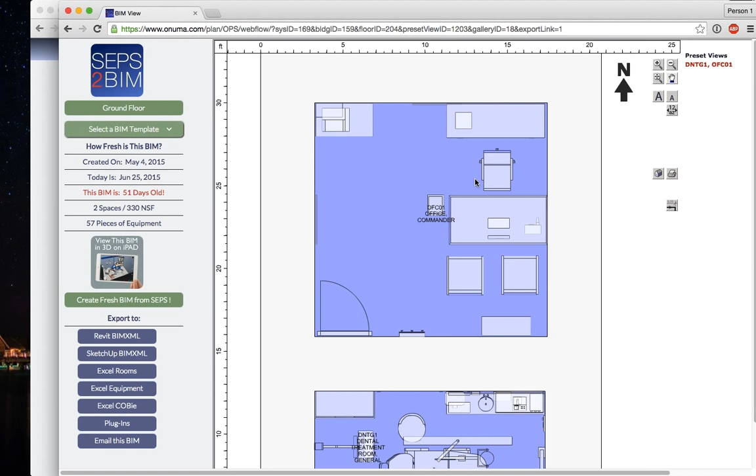That essentially gives you a BIM that generates a space and can show you the floor plan. You can export it to Revit and SketchUp and all that. So we're saying, okay, that's a starting point. If you do that and send a request in, that means you've actually touched the data, you created a BIM, and you can go away after that if you wanted to—although we really want the teams that are on today to do more than that.

On Tuesday, we had over 60 people that actually submitted something, even some that did multiples, and there was about 680,000 square feet of BIMs generated, both from this department and from the space and the department. So that's part A.

The idea is that these submittals, we're going to make that one of the projects that we park in the system, and I'll explain that as we go along. So the submittal says, okay, we need a new dental exam room. And the default is going to look like this.

One task might be a team that's an expert at medical planning for equipment and layout. You could take just this single room out to SketchUp, Onuma, or Revit, make recommendations, change the size of the room, move the equipment, or even add or delete equipment, saying, based on today's practice, here's what a dental exam room should look like, and submit it back. We want to keep the task simple so you're not going through 300 rooms doing this.

Even if you move a single piece of equipment or add a piece like a Stryker boom arm into the system and submit it back, that would be a win, saying we had an interaction with owner data from SEPS, VA, and DoD that says here's what we know is in our database. Then the designer says, no, this is wrong, we need to adjust it. Because this is actually what happens at VA and DoD on a continuous basis.

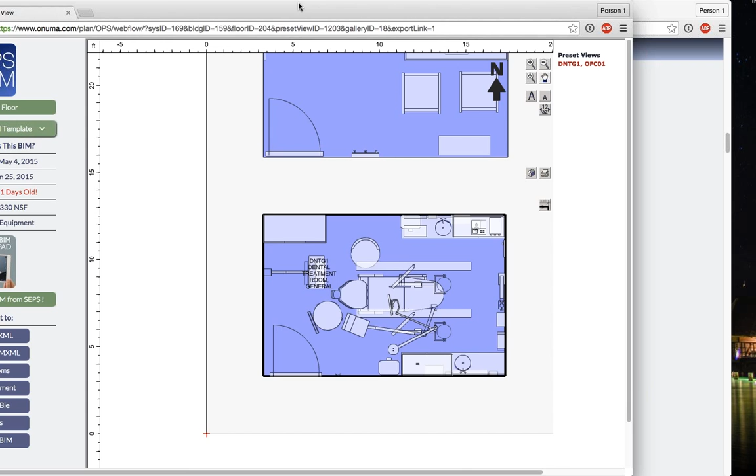They're continually updating their departments and standards, and it's been done in a very manual process. In fact, it's just transitioning now, but basically they're using PDFs and BIMs that are not connected in CAD files. So we're trying to move it towards, now that this data is accessible, there are ways to automate this process.

So that's one task. Part A generates that, which goes to Part B. Part B is design a typical space or department, take that exam room, edit it, do stuff with it. And by the way, these recommendations are just guidelines. You can take off from that and do anything you want, as far as having a better idea of how to do this, or other applications. We're not limiting the tools being used. We just want to really see the connections that can happen.

For example, you might even say, well, we want to delete all the equipment and make a recommendation for a completely new room or a completely new way of doing this. If we can demonstrate that, we'll make that part of the result that we present on the final day.

So Part C, design team part C, is design a project using the SEPS BIM Excel export.

I'm not sure if Attainia is on. If Attainia is on, can you raise your hand or chat in the box there? Young, I think you're tracking the chat, but we can open up the mics too if anybody wants to speak while I'm going through this.

But Attainia does a lot of work with SEPS. They're SEPS experts. There's a lot of different consultants out there that work with SEPS, but Attainia is one of the leading firms out there that actually works with SEPS, and we had a discussion with them last night. And we already have a SEPS.

I have Michael Blair unmuted if you... Oh, Michael. Okay, great. Or thanks, Michael. Speak as well. Are you there, Michael? Yeah, definitely, Kimon. Great. Thanks for the opportunity.

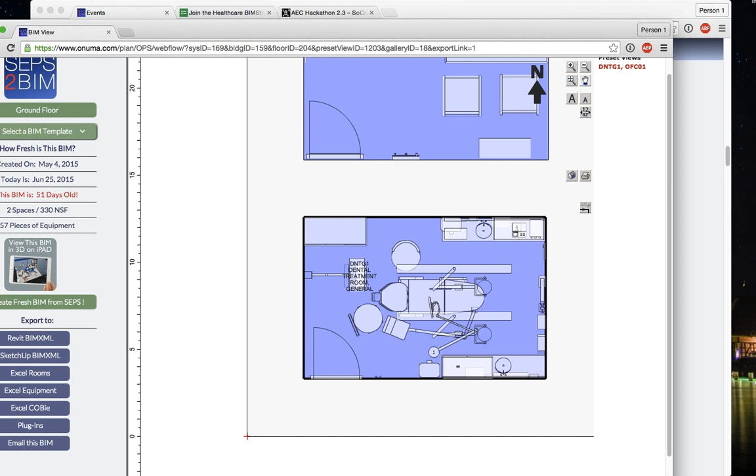Correct me if I'm wrong, Michael, and I'll let you explain what we've been doing together about that. So you would actually be adding more information to this generic room or the hospital, or adding more information from the Attainia side to the project that's being set up. Is that correct? Yeah, so the goal is essentially, as the project matures and the life cycle goes through, that we're adding more specific detailed data along the path, and then within the modeling systems you can actually see the attributed data of the specific equipment.

So instead of a generic piece of equipment from the JSN side from SEPS, you can now see the more specified model that's actually been chosen for that room. As you start to make design changes, you now have that more detailed information at your disposal to make specific decisions in real time. So whatever you can participate on that, we'd love to have Attainia's name in this, because this chair that I just opened up that was in that room has very limited information. This is intentional from the VA side; they don't want to specify a specific product here, but Attainia has information that can be added in. This is a good example of how, as the teams work together, there's a lot of different experts and tools that come into play.

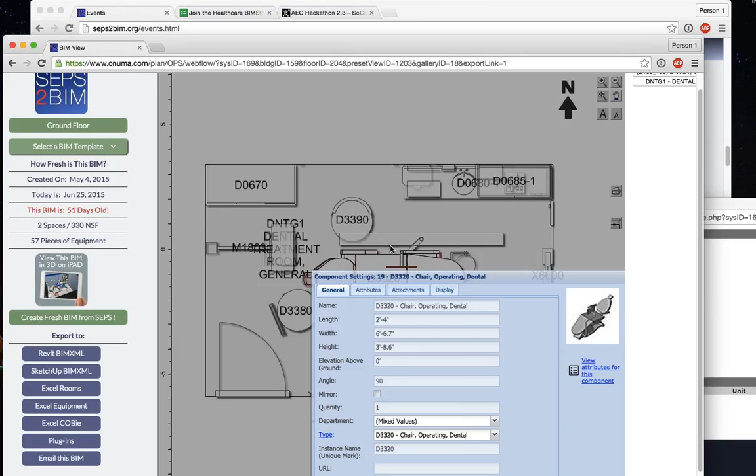Not everybody has to understand all the systems. So if you're a designer laying out this room and you want to do a layout of an exam room, you could just focus on that. And as Attainia comes in with their data, more information can be added to this chair, saying here's 3 options or 10 options for a chair. That's one very simple scenario getting a lot of attention from healthcare owners: how do we transition from a generic assumption that we need this kind of chair in this room, to actually making a recommendation of a specific chair and then delivering it.

Okay, and part C, Enova, is Enova on? Regarding Enova, we have Luis Martinez and Eric Hunt. I'll go ahead and unmute them. Okay, great. So Unova, are you on?

Hello? Okay, well I could actually explain what, so yeah. Eric and Luis, if from the Innova group, are you guys on? Let me tell them that we're trying to get you. Okay, I can't hear you very well, but...

I had an email back and forth with Chris Phillips from Innova last night, and we've worked with Innova before on other projects at VA and DoD. As I explained earlier, Innova works with SEPs; they know how to output from SEPs. So the idea is we'd like the Innova group to participate by doing a sample project.

It won't unmute me. Oh, I can hear you now, okay. But your voice is very weak, sorry. So this is Chris. Yeah, go ahead. Oh, hi Chris, sorry. Yeah, Luis and Eric were just listening in, so I was the one looking to get unmuted. I think one of the questions, let me ask you again just to make sure I hit the piece you want.

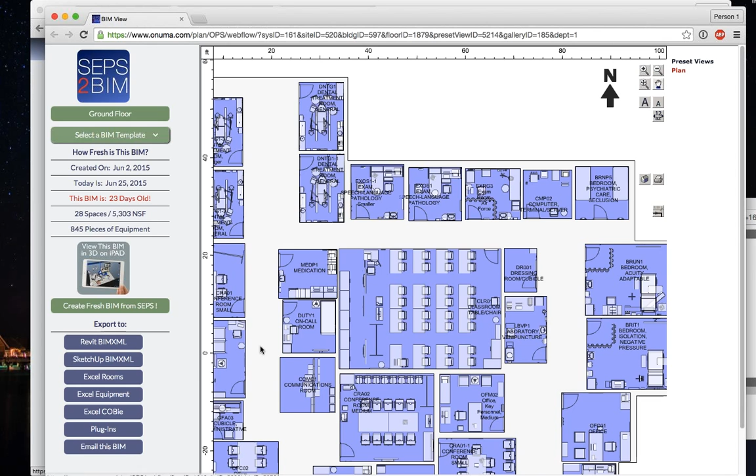For those that have access to the Onuma system, if you have a login already, you can log into the Onuma system and get the full functionality of this project, which is linked from here. Or you can use the link I'm showing you, which is open to anybody. This is completely public — you're not able to edit and move spaces here, but you can export to other applications. If you had Onuma system access, you could launch into this and edit it.

We'll give everybody that's part of the BIMStorm team who's logged in today, if you're going to be participating, access to the Onuma system. We'll give you a login and instructions on how to get there. But you can even take this and say, okay, let's take it out to SketchUp and take it out to Revit. Now, one clarification here.

The layout you're looking at here, most of the rooms look like they're actually resolved — they look like rooms with the equipment where it should be. These are starter templates, as we're calling them, kind of a default location. The ones we'll be getting from Enova, there's going to be quite a few spaces, because out of the 500 that exist in SEPs, there's about 200 that have layouts like this. The other 300 have what we call a truck delivery method, where the equipment is stacked in the corner of the room — it's the actual data from SEPs, but it's not laid out.

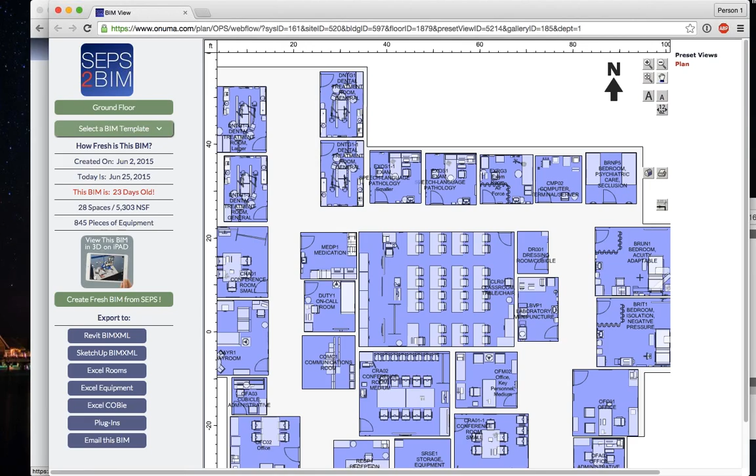Especially on the Onuma side, if you add a new JSN that doesn't exist here, it's going to show up as a block, I believe. But we'll still have the equipment in the space. So it would be interesting to see that interaction — what happens with the design teams when they see a mixture of laid-out spaces with equipment and other ones that don't have any layout.

Okay, so we have a bunch of teams, and maybe if anybody wants to say anything from the design and construction side — I know there's quite a few of you online right now — just put it in the chat box. But I'm going to go ahead and introduce the scenario for that.

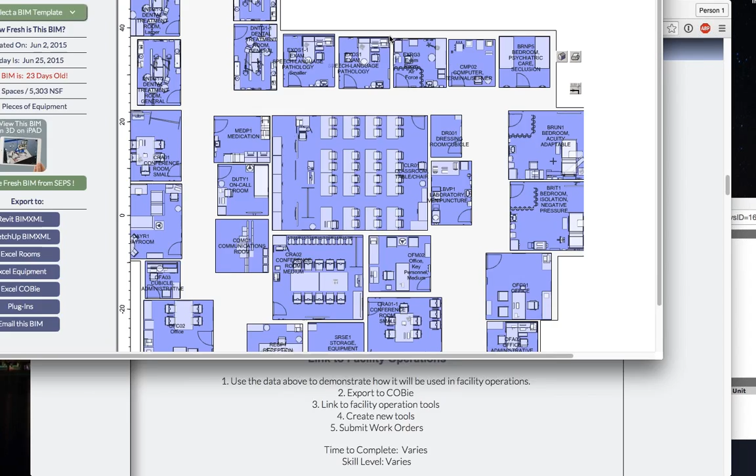I'm open to recommendations and different approaches to this, but you would take the program requirements we just described, and it's going to look something like this. Your task is to do something with it, even if minimal, even if it's saying we think this layout, these rooms should be over here. They're going to be stacked together, so you might move them around, move them to a different floor, or even focus in on a single room.

We're not looking for resolution of the whole design. We just want to see some examples of interaction that we can demonstrate in the hack. And we're kind of redefining in many ways what the hack is all about. A hackathon typically focuses more on the programming, the development side of software.

But we're saying on the design side, as decisions are being made and data is being added, when you move a piece of equipment, like from SEPS, if you add another piece of equipment, or if the designer grabs this and moves a space around and moves equipment around, the data in the background is changing, and the development team that has access to the data will see changes to that database. So if a new room appears, it'll show up in their database. If they create a mobile device, or have a mobile device for reporting or asset management, they will see that data live.

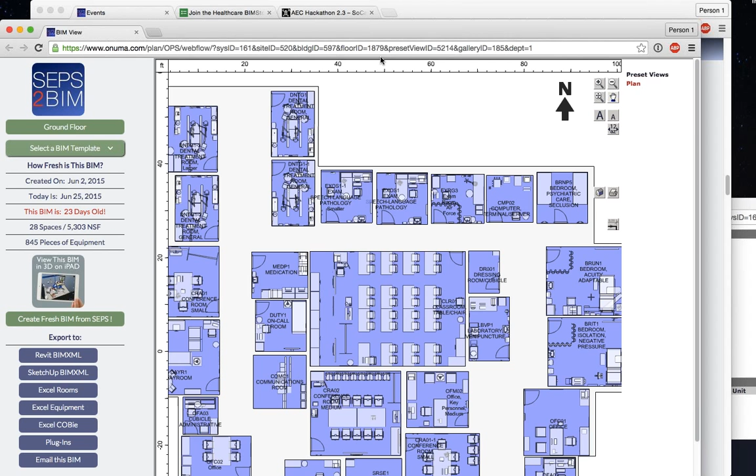That's the intent here: it's not just about teams developing software, it's actually teams making decisions that feed into the data that gets updated. So we're trying to show the full view of that.

So design teams, does anybody want to say anything or have any questions about this design and construction process? We're looking for things like making decisions about design.

We're looking for things like possibly cost estimating. We're looking for things like spotting potential problems that you, as a medical planner, can see coming out of SEPS, because SEPS is not perfect. Like Nova mentioned earlier, there are changes that happen that are not updated, and there's domain expertise that says, okay, we know this exam room coming out of SEPS is using an old piece of equipment, so we swap it out when a project happens.

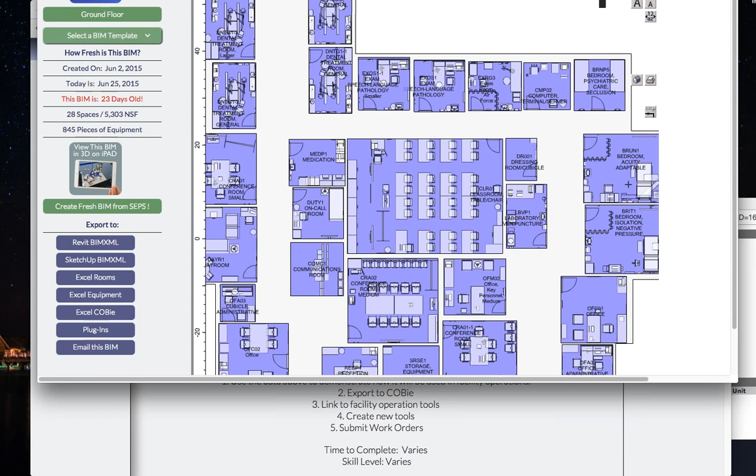So we want the design teams to be able to interact with these models. And one significant thing on the SEPS-to-BIM process: we identified in the SEPS output there are what are called GUIDs, a unique ID for every single space, every single piece of equipment, unique to that one chair in that one room on that one floor in that one project. That can be tracked with applications.

The SEPS output typically used today, or in the past, by VA and DoD, is they export what are called PFD, Program for Design, and Project Room Content Excel files and PDFs that most architects use as a starting point to load the one-million-square-foot hospital and load all the equipment in. But those outputs from SEPS do not have GUIDs, so you can't track the individual equipment.

The fact that we're focusing on the SEPS data with the GUIDs means we can do things like what was explained earlier with Atania, where they can swap out and say, well, here's a better piece of equipment, and we can still say that that's involved with that GUID.

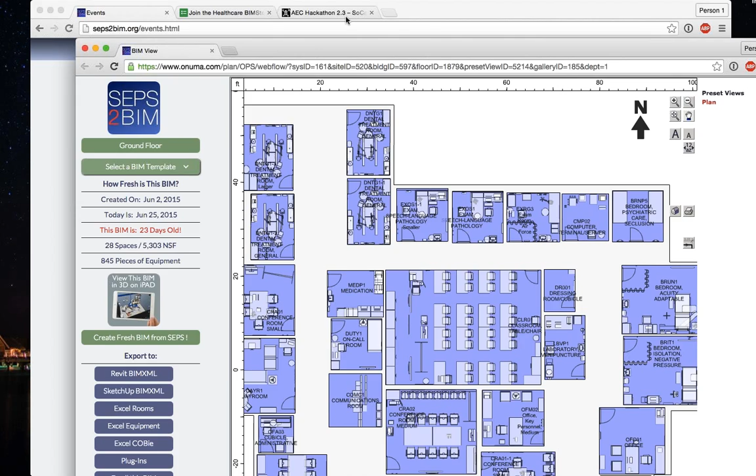So I'm getting a little technical here, but the point I'm making is that there's a lot of stuff happening in the background to support, for example, checking the delta between the design and what happens as the project progresses. So does anybody have any questions on that part?

We can open up the mics here if you raise your hand and say you have a question or comment from the design, construction, cost estimating side.

Kimon. Yes. It's Ryan. Hey, Ryan.

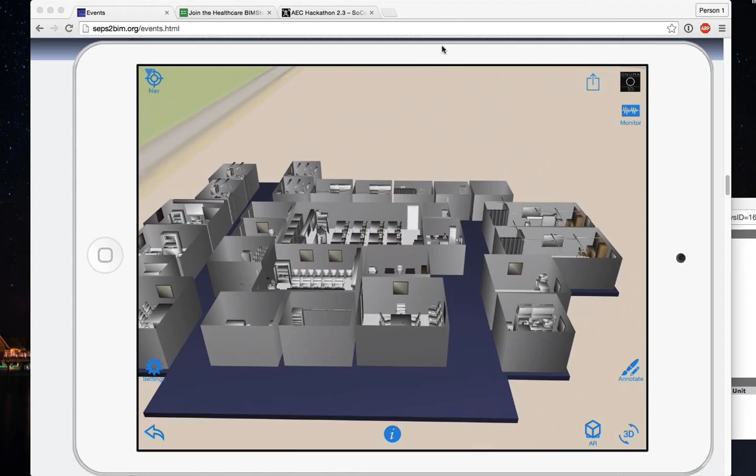So this is Ryan Gear from SketchUp, and I'm coming with a few different things to share. One of them will be an actual clinic program that should be getting delivered to me today, which would be great for one of the teams to look at. It's a program proposed by a local children's hospital, and that would be one of the real design scenarios we could put into play in this whole BIMStorm.

Okay, great. We'll have to work together to figure out how to get that into SEPs. So we'll work on that together.

Ryan and I are going to be physically there at UCLA, and Ryan's been helping. Ryan, Gary Technologies, and others from his team have been helping set this all up for weeks, months now actually. We're considering that one to be one of the first hacks because we open sourced the plugin from Onuma, Trimble, SketchUp. Gary Technologies took that and actually developed the SketchUp plugin. So within a week we had a first version, and now there's a connection between SketchUp and all of this data.

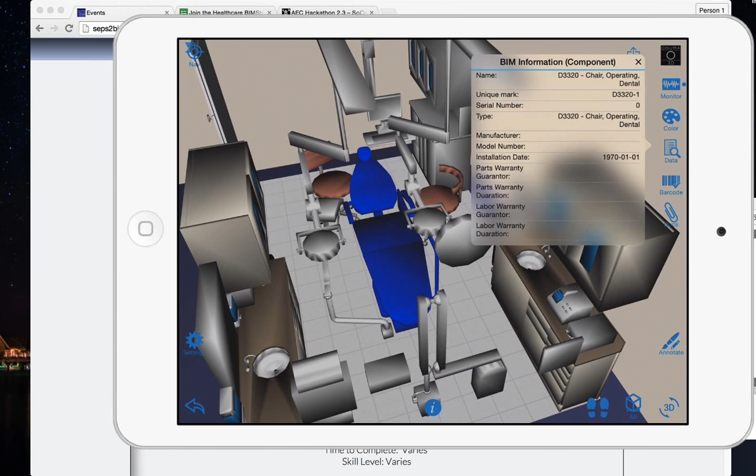What I'm showing on screen is the same project we were looking at earlier, but this is in the Onuma iPad app. If you opened this in SketchUp, you'd see the exact same thing. This is the clinic with a chair with generic information in it. This iPad app is free too, the Onuma iPad app. We'll point everybody to this so you can download these files, and even download the projects as they start getting loaded in.

The Onuma SEPs output, when loaded into the Onuma system, will be immediately accessible on the iPad, and we'll be able to look into a room like this, and the new piece of equipment that Michael added in SEPs would actually show up as a block in the room. So here's a new piece of equipment or other information. The idea is to have all this stuff happening in real time as a project progresses.

Anybody else from the design construction side that has a question or comment?

I'm talking kind of fast here, so sorry about that, but I want to get through all this.

I'm going to jump back just for a second here, because we've been talking about an actual program for an actual project that comes out of SEPs that Onuma is going to be setting up.

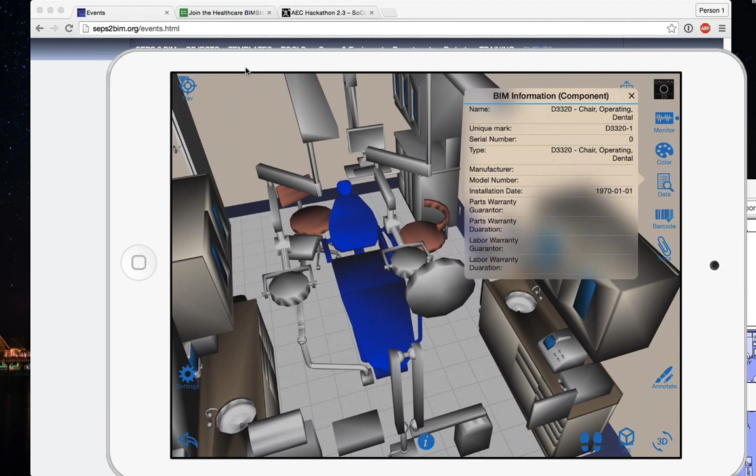At the same time, we have what are the typical spaces and departments. These are generic, here are the typical rooms that would look like this, and the typical department, here's one of each room in a dental clinic.

VA and DoD spend a lot of resources keeping these up to date. Every year they hire consultants to do what's called a department update. We need to update the standards that VA is publishing about operating a surgical suite. They spend about six months to a year interacting with clinical staff, working with designers and medical planners, capturing those requirements, documenting them, putting them in a PDF file, extracting that data, putting it into what's called the SEPs criteria. So there's a lot of very valuable knowledge being processed in those tasks and projects.

Part of our work with VA was to figure out how to streamline that and use more of this BIM-centric, data-centric process to do that. So it's a different kind of project in many ways. It's not a project they're actually going to construct, but a project to update their latest standards.

This is where the medical equipment comes in, if a new piece of equipment is available, they would have that discussion. For example, if this boom arm, let's use this as an example because it actually came up: we had comments from a VA medical planner who said, hey, I see this 3D boom arm and this lighting fixture, and it's not an LED fixture. We no longer use that kind of fixture anymore.

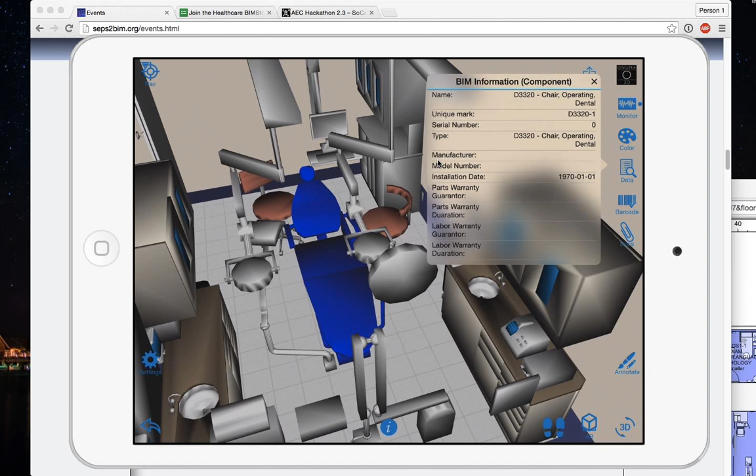And the idea is, it's actually in the SEPs database, in the 1691 database, as a cut sheet that looks like a round fixture. So because it's in 3D now, they're able to react to it and say, that's the wrong piece. Therefore, how do we maintain and update that?

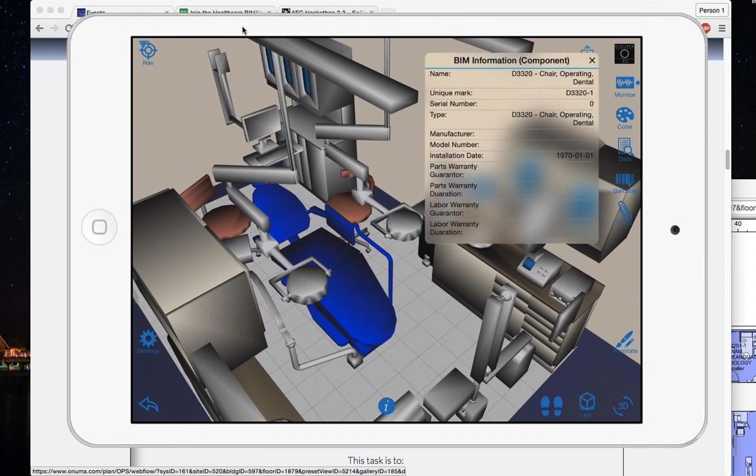We want to demonstrate that this process should be much smoother and more efficient, but how does one react to, how do we update our standards? So if a team can focus on that, Onuma, Etania, and others could make that an interesting scenario: let's update an exam room with the latest information and latest standard requirements.

So it's a little bit different than a project, but it's one of the other tracks that we're talking about. Okay, so

Interact, and we have to change this name here. We called it program team, but we called it the development team, software development team. So everything that's happening up here, the software development team is going to be seeing the data coming out with it. So even if you know nothing about software development, the decisions that you're making in BIM are going to be published out to the development team and made accessible. So having some kind of an interaction, we're hoping that we find teams that have some kind of application or that can build an app or already have a fully developed application that can connect to this data through web services, and having that even simple interaction would be great.

So this is going to evolve, I think, as we work our way through the hackathon. Any questions about that section? Okay.

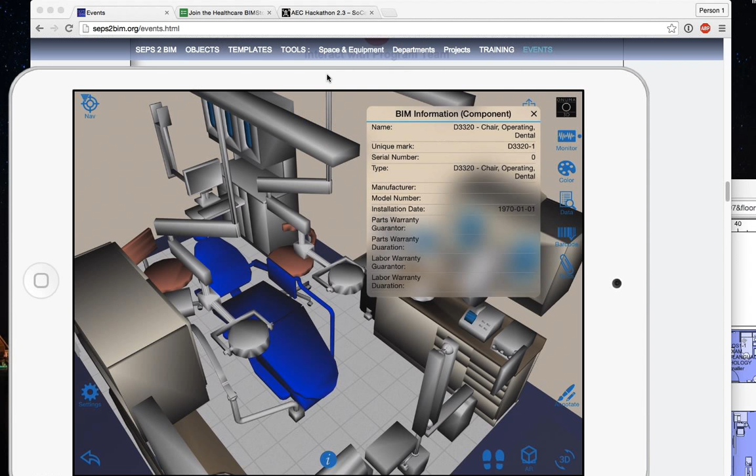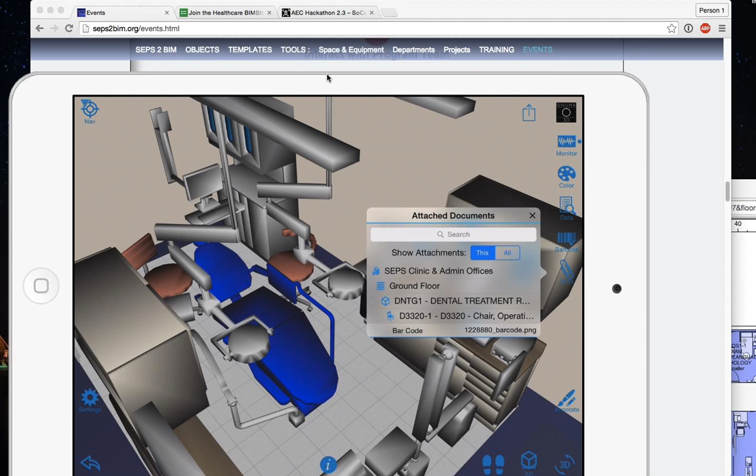Then we have what's called E-Link to Facility Operations. We actually have this project that we've set up already. All of this data actually has information associated with it. So for example, if I go to the data here, there's barcodes associated with every piece of equipment. So if we had a barcode like this, and we're going to print a few of these out, if we scan the barcode, it would jump directly to this piece of equipment and this room. So we're basically linking barcoding and tags to specific locations in the model, and we're going to try and bring that in. We're using our system, the Onuma system in this case, but if there are other applications that can also link into it, that would be great.

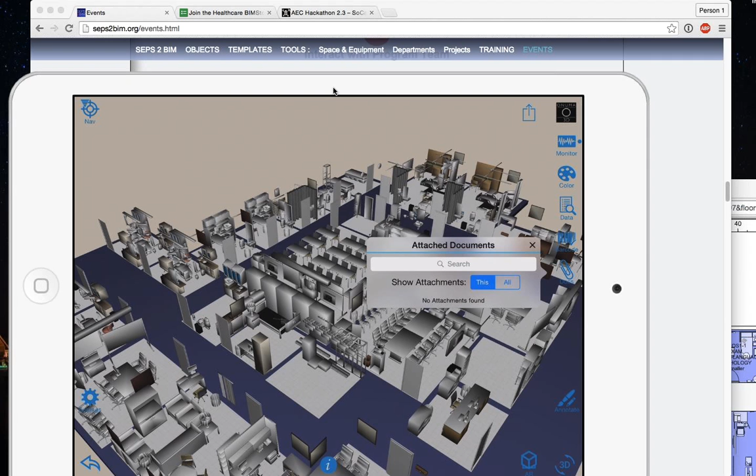And we've also set up a work order request interface, a web interface that can send work orders for a specific room in this building. So we're trying to simulate how does this go into operations and maintenance. So as this life cycle progresses, the project is delivered. Now we're actually maintaining this facility. We can open up an iPhone, take a picture of it, submit it. It gets attached to the database. It gets output as COBie. All that kind of stuff can be happening in the background. We already have that set up. So we want to just declare that that's happening as part of the hackathon, and then get people to interact with it and maybe even have other applications link into that. So that's what this section is.

And section F is really your choice when you're not limited to what we've listed here. If you have another great idea, in fact, if anybody wants to speak up now and has something that they think like Ryan mentioned, something different, we'd like to hear about that right now.

Okay, hey, come on, it's Fineth. Yeah. Hey, Fineth. Hi, how you doing? Good, how are you doing? So, I'm good. Yeah, this is Finith Jernigan with Design Atlantic. Come on, I'm as usual. I'm not following anybody's directions here, so that's good.

Yeah, well, so I had 2 or 3 issues or questions. I've pulled the Excel files out of the SEP to BIM system, so I think the place where it's actually maintaining the BIMs, and I can actually drop those into a studio in the Onuma system and do what I might want to do with them. But I guess the first question is just a mechanical thing. You're going to create a special studio for this, so that right. We have 2 studios. We have one called VA SEPs, another one called SEPs itself, and we'll point you to it. Those 2 studios are important to use because they have the SEPs objects and everything already set up.

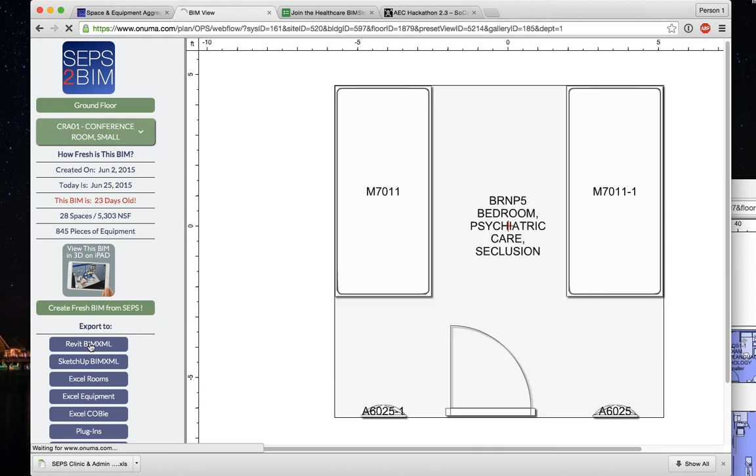I'm trying to think whether it's there, but basically what I did is I selected the dental clinic, dental service 222, so it has everything populated. It's just not refined. So what you're going to get is a subset of SEPs that's specific to that dental clinic which was created. So you could do that, or

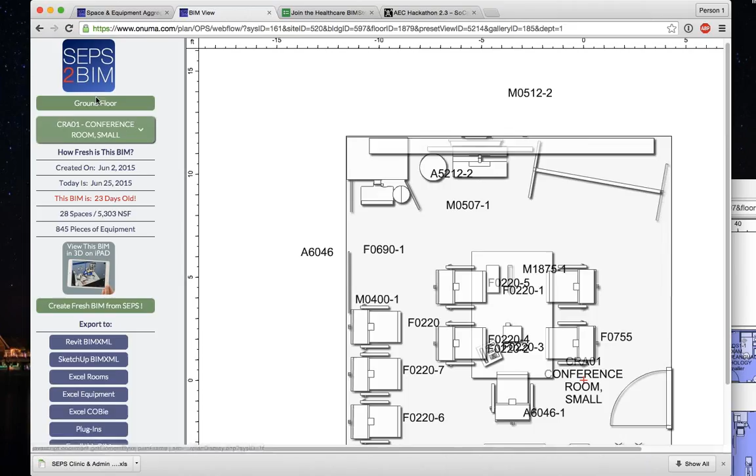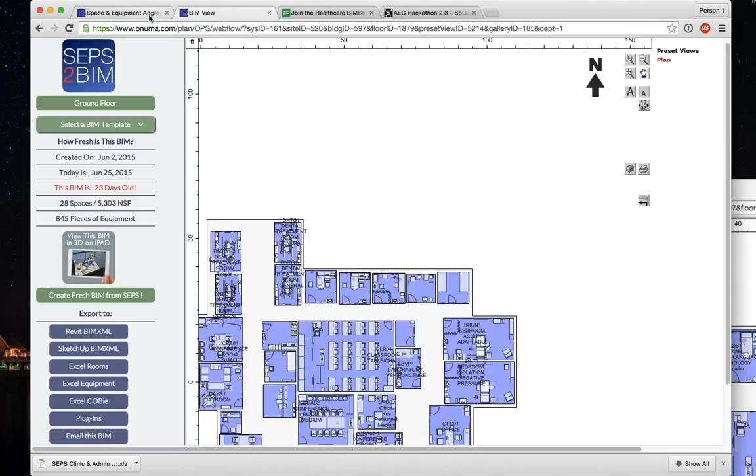you could actually go and create your own recipe of rooms. You don't have to necessarily use it, because this is basically a specific layout of a specific clinic with specific equipment coming out. And what Innova was mentioning earlier, from SEPS they actually adjust equipment before it even makes its way into this - they work with clinical staff, and if they want another piece of equipment, before it even hits this it gets adjusted in SEPS.

Now you don't have to use that, and I think what you're suggesting is you want to create your own recipe of things. So what's happening here is I've got an existing Votech school, right, it's got a dental clinic or dental training component. I figured take all the bits and pieces that would be in a full dental service, and I'm going to basically test fit them into existing spaces, just like you do a renovation.

Okay, well what I would suggest, even if you take the sample one, because this is really a sample - it's one clinic, it's already a project essentially, and we're going to be tracking this project. If you want to create one from scratch, maybe we should do this offline because I could walk you through it, but there are several ways of doing that. One is to go and just request a brand new department - so I want a new dental clinic.

Right, another way, and I think that's where I got the information - another one is actually creating your own recipe of rooms. So you can go and grab the list, there's a full list of 200 or 500 rooms, and you can say well I want one of these and one of these and one of these, put commas in it, and we'll create a custom one just for you.

That just seemed like too much work. Well, that's fine too - you can actually take the one that's here, because you have access to the Onuma system, duplicate it, and start a new one. What I would - well, we could talk offline, because I know you're very familiar with all these tools, so we can get into specifics. I don't want to get stuck on this right now.

The only issue, and we can talk about it later, is the return flow back into the system. Going out and doing stuff in the Onuma system isn't a big deal, but the return is the issue. And that's why it's important that we know where the trigger is, the starting point. So either what Innova was mentioning of coming out of SEPS with a very specific owner requirement, or building it with a recipe from here, or duplicating one that already exists and creating your own - those are all valid, but we just need to walk through to make sure that when it comes back we can actually track that. So let's talk offline.